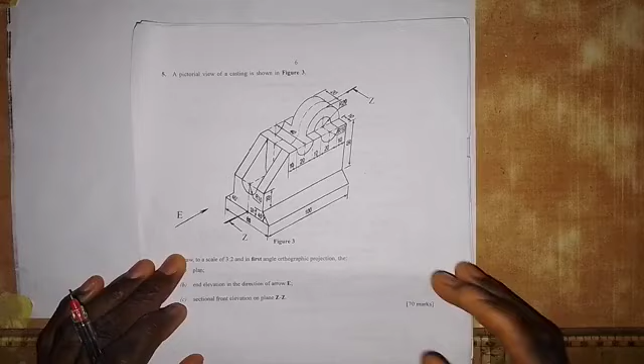Welcome to my channel, and here we are going to solve this particular problem which has to do with mechanical

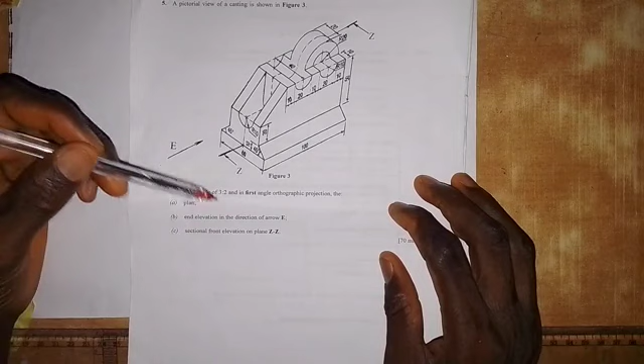drawing. As we have here, a pictorial view of a casting is shown in figure 3, and this is the figure they are referring to. Here we are asked to draw to a scale of 3:2, in first angle orthographic projection, the plan, the end elevation in the direction of arrow E, and the sectional front elevation on plane ZZ. Okay.

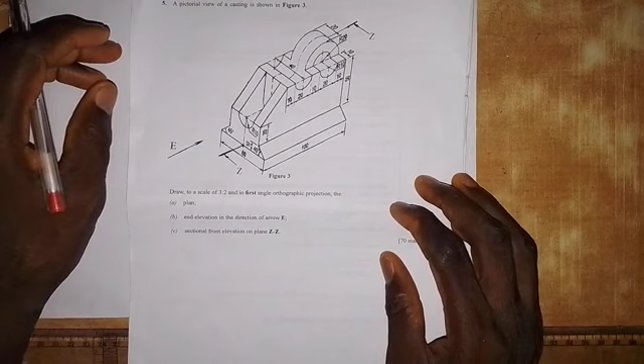Now, for all the dimensions that we are given on this object, we are to multiply each of them by 3/2. Whatever we get at the end, that's the dimension that we are to use based on the scale that we are given. I believe you can see all the dimensions, but the total length from here to here is 100. If I multiply 100 by 3/2, that's going to give me 150. That is, I divide 100 by 2 and multiply the result, which is 50, by 3, and that's 150 millimeters for the length of the object, which we are going to use in the plan.

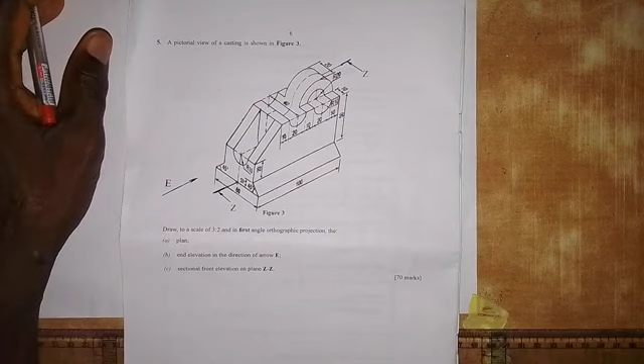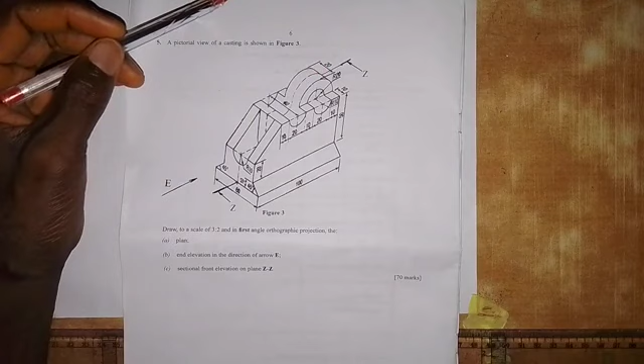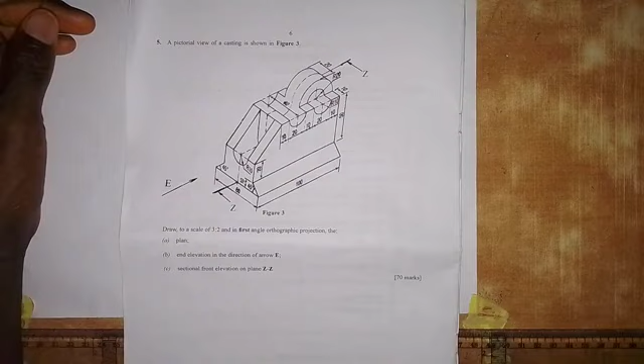We also need the width: the total width is 60 millimeters, and that will give us 90 millimeters. The distance from here to here is 20 millimeters; 20 by 3/2 will give us 30 millimeters. The distance from here to here is 40 millimeters, and 40 times 3/2 will give us 60 millimeters. And for the width, if we multiply 60 by 3/2, that's 90, as I've said before. Okay, so let's start and see what we are going to do.

The first thing we are going to do, since we are asked to draw the views in first angle orthographic projection, is simple: I'm going to start like this since we are drawing the plan first. I'm going to draw a horizontal line like this. Then on this horizontal line, I'm going to draw a vertical line from this end down here. I'm going to take a measurement of 150 millimeters, which is the total length of the object.

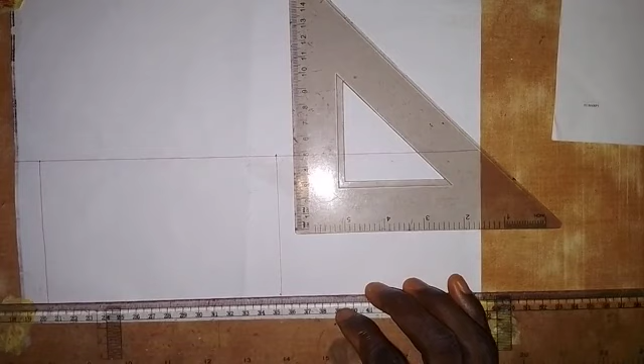Don't forget that we are multiplying each given dimension by 3/2. The length as given in the drawing is 100 millimeters. If I multiply 100 millimeters by 3/2, that's going to give me 150 millimeters. The width as given in the drawing is 60 millimeters, so 60 times 3/2 will give me 90 millimeters. So I will take a measurement of 90 millimeters here. Then I'm going to draw a horizontal line like this.

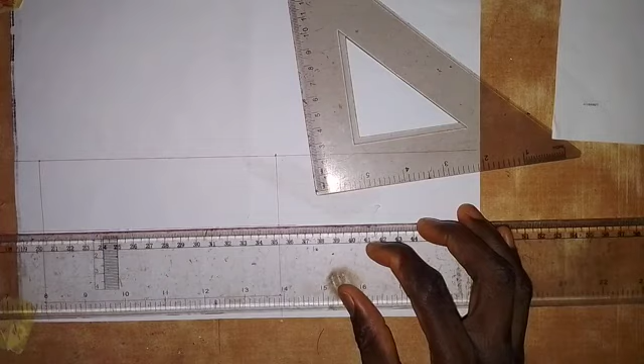I need to get the midpoint. Very, very important. That's 90 by 2, which will give us 45 millimeters. So here I have 45 millimeters, and I will draw this line as a center line like this. Alright, the next thing we are going to do is bring in the object as given here.

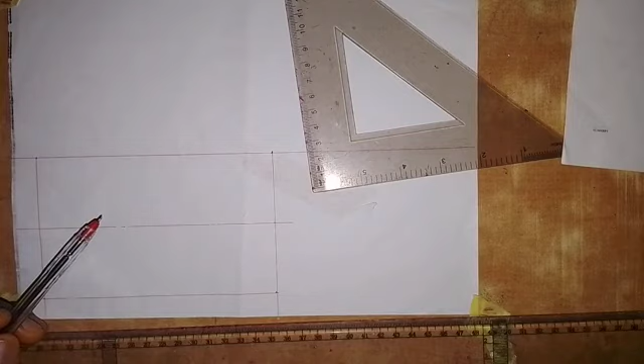For us to get this line, and we also have the same line on this side, the distance from here to here, as we are given, is 40 millimeters. 40 multiplied by 3/2 will give us 60 millimeters. That means I'm going to take 30 millimeters from this center line down, and 30 millimeters up, for me to get that

line there. Don't forget that we are working on the plan of the drawing first, as we are told that we should draw the plan, and the views are to be drawn in first angle orthographic projection. So I've gotten this now. This is part of what we are looking for to get the plan done.

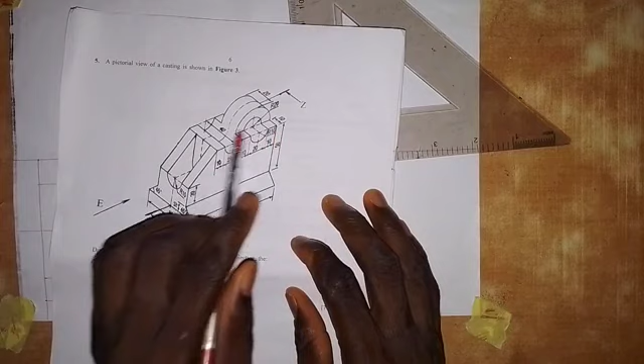Okay, the next thing that we are going to do is that we come here. Now let's get the total distance from here to here, as we have that. So from here to here is 10, from here to here is 20, this is another 10, this is another 20, and this is another 10. Okay, so that means we have what? We have 10 plus 20 plus 10 plus 20 plus 10. So that is going to give us a total of 70 millimeters.

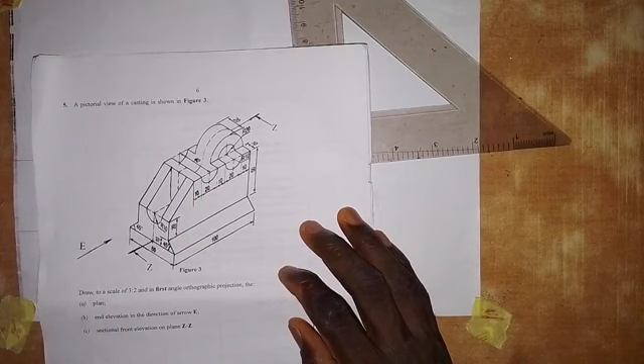Okay, so this is 20. So this is 10 plus 10, 10 plus 20 is 30, 30 plus 10 is 40, 40 plus 20, that's 60, and 60 plus 10, that gives us 70 millimeters. So let's get that distance. So we take it on the horizontal line there, 70 millimeters. So this is, okay,

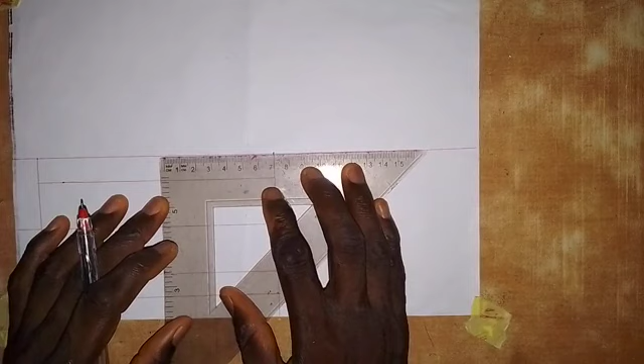so we are going to multiply that 70 by 3 over 2, as I said. So 70 by that is 35, and 35 times 3, so that's going to give us 105. So that's 105 millimeters. So we take a measurement of 105 millimeters. So this is 105 millimeters there. So here I'm going to draw a vertical line from here down. So a vertical line from here down here.

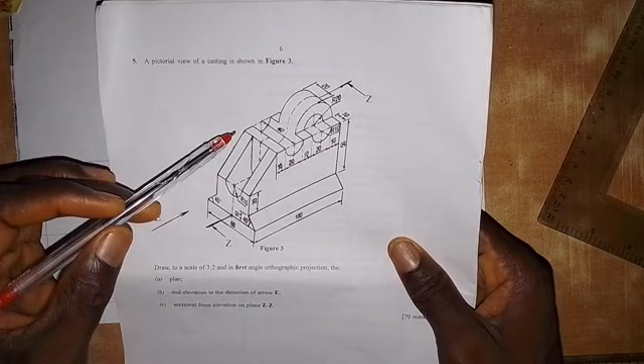Okay, so now let's work on what we have here. Even I'm not supposed to put it, but let's leave it because I'm not going to make it thick. Okay, so now let's start with this distance from here to here, which we have already taken. So just to take this thickness. This thickness is 10 millimeters. So 10 times 3 over 2 will give us 15 millimeters. So I'm going to take a measurement of 15 millimeters from here. So this is 15 millimeters. Then I'm going to draw a line. That rectangle, as you see there, we also have it as a rectangle in the plan.

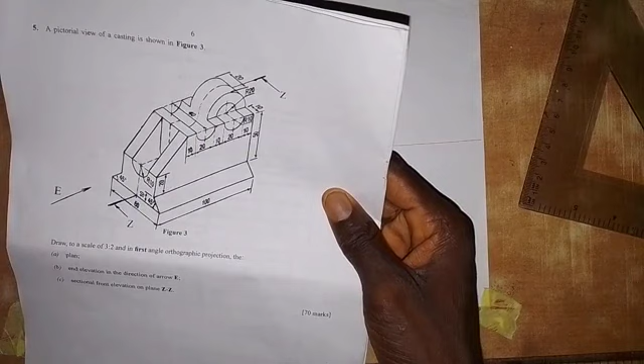Also, from here to here is 20, and 20 multiplied by 3 over 2, that will give us 30 millimeters. So I need to take a measurement of 30 millimeters. So this is 30 millimeters now. So I will still draw this as a line from here to here. Okay, so that's going to give us something like a rectangle, but let's leave it for now.

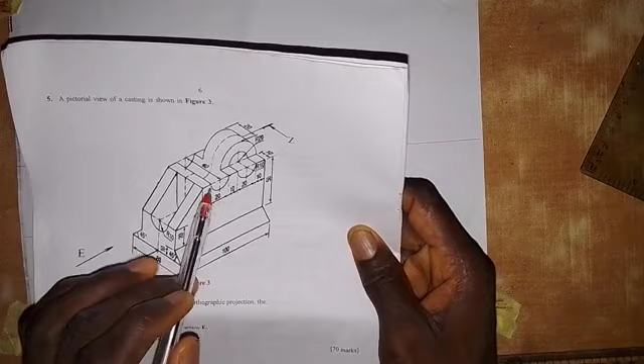So we also have from here to here is 10 millimeters. That's also 15 millimeters. So I will take a measurement of 15 millimeters from here. So this is 15 millimeters. So I will draw a line like this here. The next one is also 20, and that gives us 30 millimeters. And the rest to be 15. So I will draw this line like this. Okay, so the rest here is 15 millimeters.

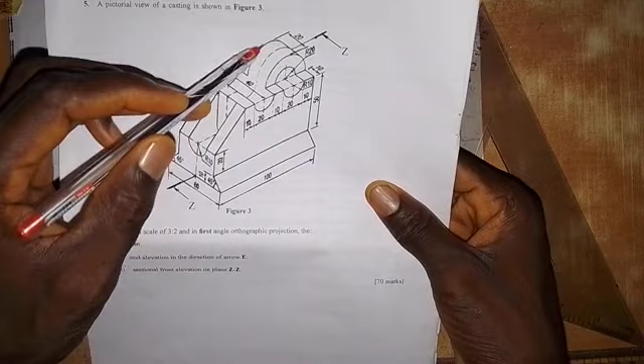So the other thing that we are going to put here is that we have this thing here. It's going to give us a rectangle, and they said that the thickness is 20 millimeters, which is going to give us 30 millimeters. So what we need to do now is to take a measurement of 15 millimeters down from this middle line. So this is 15 millimeters, and we take 15 millimeters up here. Then we are going to draw a horizontal line.

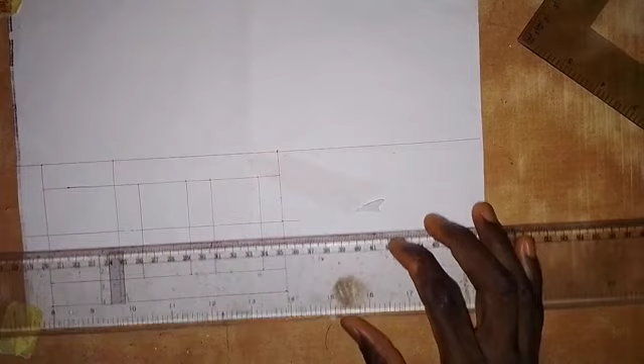Okay. So we draw a horizontal line that goes from here to here. So it will end here. And we also take it from here to here. So it's going to give us a rectangle like that.

Okay, so with what we have done here, apart from this one, the thickness from here to here is also 10. So let's take that. I think we have already taken it. Okay, we've not taken it. All right, so from this line, it is 10, so that's going to be 15 millimeters.

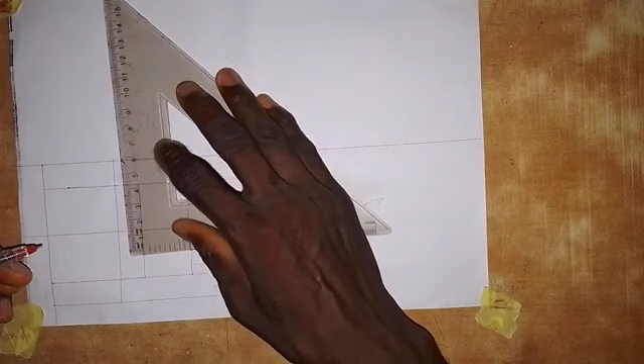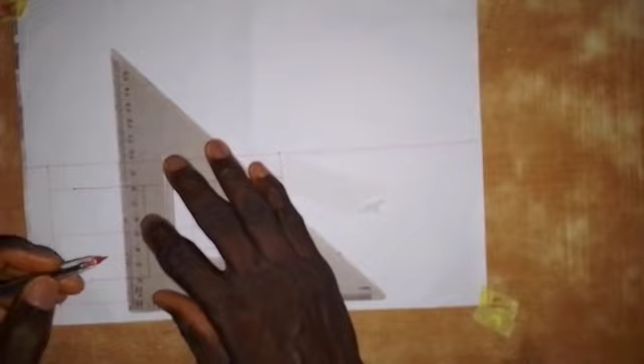So from this line here, we are going to take a measurement of 15 millimeters. So this is 15 millimeters, and we also come here from this point and take 15 millimeters in here. So that rectangle has come out, so I will just draw a line from here, and then I will draw a line from here to here like this.

So with what I've done here, I think all the parts are already here. So what we need to do now is to bring out each part using thick continuous lines so that we can see how the plan looks. So I'm going to pause the video and do that, and then I will come back when I'm done with the thickening of the visible outlines and edges. Okay.

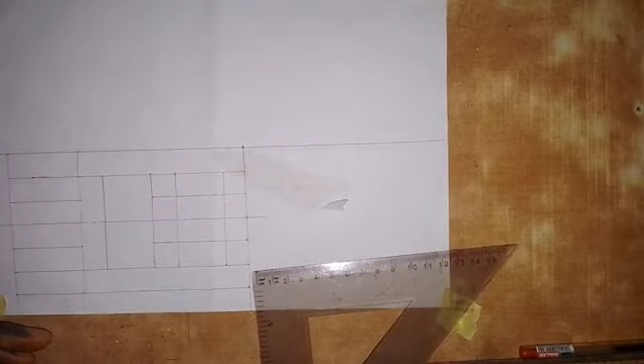Alright, let's do it together. So we need to make this line a thick line, and let me show you the line. That is this line here. This line that we have here, as I said, is going to give us a rectangle. So we make this line a thick line from here to here, and this also will do the same thing. So we'll make it a thick line like this.

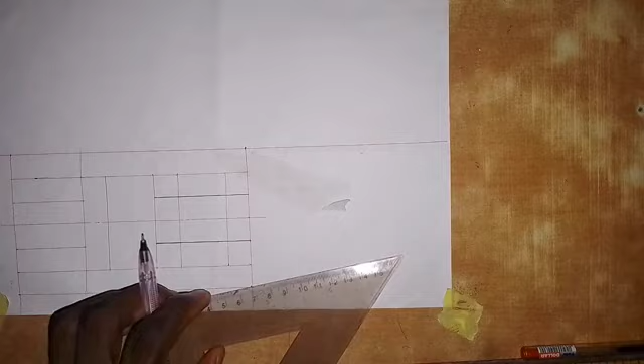Okay, so the next one that we have here, so this line and this line and this line and this line, let's bring them out. So we have them here. So we have this one like this, and also we have this line. So we also have this line like this, then we have this line. Also we have the same thing on this side.

Alright, so we have those lines. So this line also, we are going to make it a thick line from here to here. So that is for the rectangle. So this line also is a thick line. Okay, so you are going to see it when we are done. So this line, make it a thick line. Also this line. Then this line also.

So also this line. So from here to here. So this line also will be a thick line. Also this line from here to here. Okay, so then this line is also a thick line. So we also make this a thick line all to this end here. So everything here is a thick line.

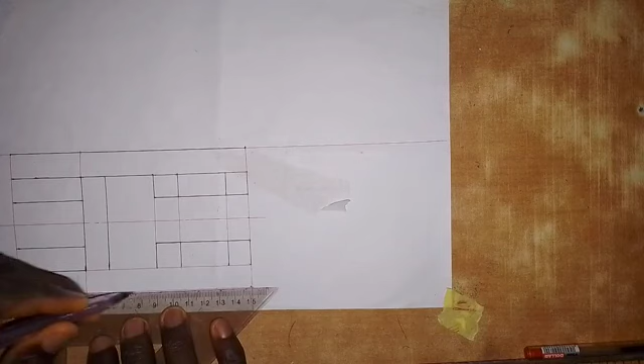So this line also, we make it a thick line. So from here to this end, then we come here. So we are going to make this line a thick line. So from here to this end, like this. So the whole of this line will be a thick line as we did for the other one there. Okay, so then the whole of this will be a thick line from here down.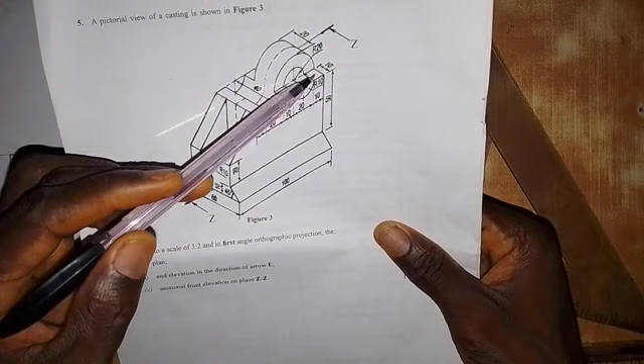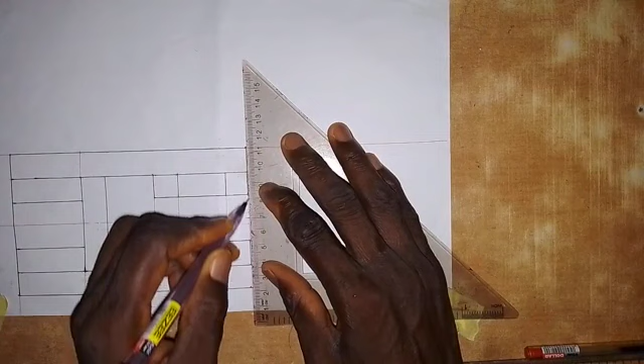Okay, so let's see what we have on this side here. So for this side also, we are going to have the whole of this line being a thick line. So the whole of this will be a thick line. Okay, so what else do we have here that we have not put here? So looking at what we have here, everything is here. So nothing is left out. Let me just show you.

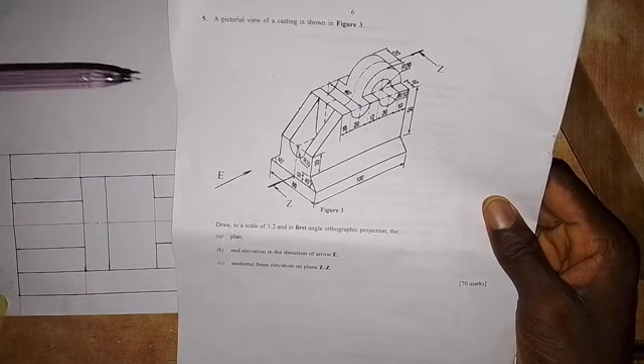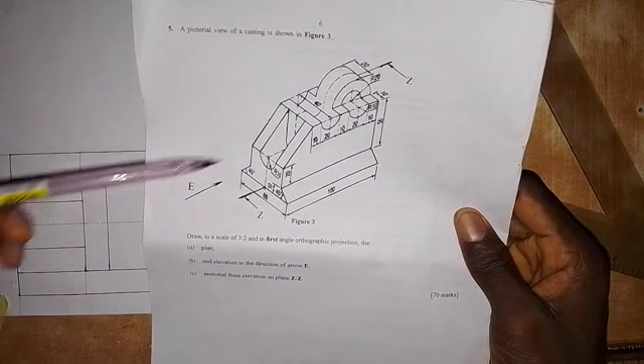So starting from this line that we have here, a line like this that we have at this point. So this is the line. Okay. Then there's a line that we have at this point, like this line here. So this is the line like this. So this rectangle that we have here is here, this rectangle here is here, and this shape that we have here, this rectangle, will also give us a rectangle in the plan. So this is it. Then this rectangle that we have here, we have it here.

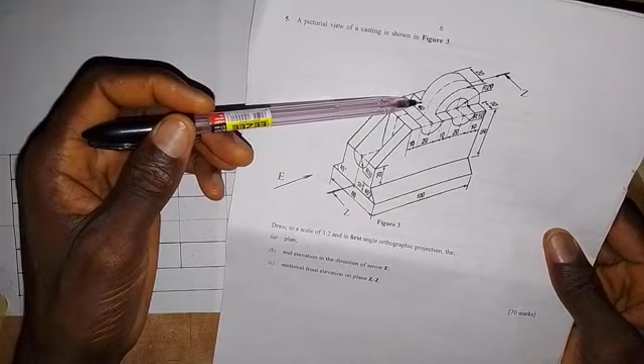So this one, apart from here, we do not have the whole of this line being thickened out. That's why I left this unthickened. So then the rest of this from here to here is what we have from here to here. Okay, so this one gives us a rectangle, and that is what we have within this part here. So then this small rectangle, or a square, we have it here. We also have it on this side.

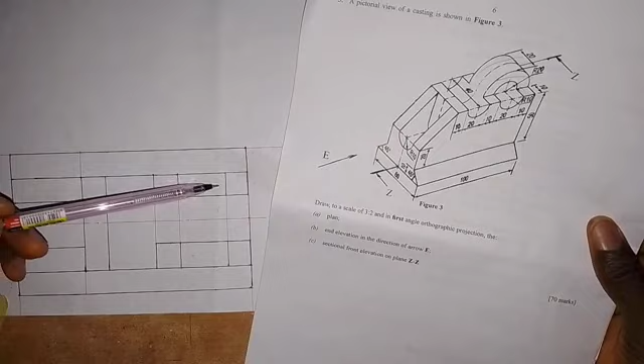So from here to here, that's a rectangle, this is it. So we have one here, we have one on this side. So this square here is what we have here, and also we have another one on this side. So this is how the plan will look. As simple as I've done it here.